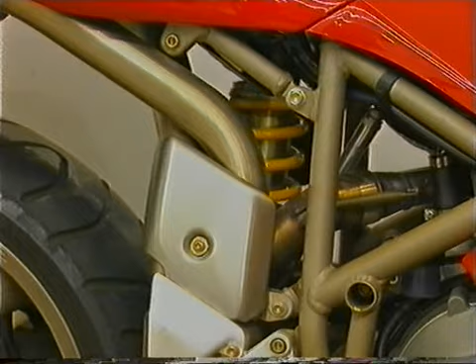They are the best, no doubt about it. They've got a great racing history, and they look fabulous. And they've got a real sort of jewel-like quality about the way they're put together. It's just a nice piece of kit to have. Everything's down to lightweight, beautifully engineered, and its whole purpose is to be this motorbike which they make for the road, but it's actually a racing machine. And that's all that's so exciting about it. But it's just this no compromise thing, you know. They don't want to sell them in big numbers. They only have to sell them to the people who really know. And that's what's nice about it.

It's very nice to have the same bike as your friend. They are very similar, but they're not the same. Mine's got a slightly different engine, and we swap and we compare. It's a sort of a boyish thing to do, you know, to ride around together. It's got this awesome performance, but although I don't use it, I know it's there. It's like, I suppose, a sort of feeling that maybe misers have when they've got lots of money, and they never spend it, but they know it's there.

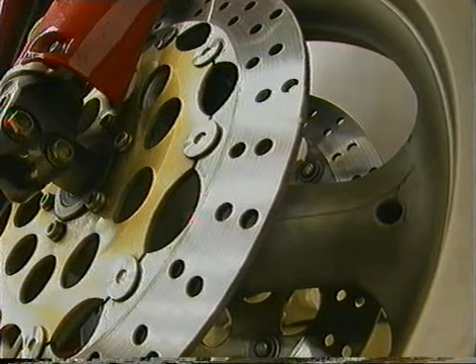Richard Rackham and Julian Thomson were to become key players in the new car project, codenamed M111. The actual link between the M111 project and the bike was something we could immediately see what was desired from the car. It was very much, oh, this wants to be just like a Ducati, which is a bit of a toy, you know, a rich boy's toy. Just something that you love having and love owning. That's what's important. The quality we'd like to have in a car. That's why we start with this project.

Lotus was founded by Colin Chapman, who was a very clever engineer and, above all else, a very competitive man in everything he did. During the 1960s, Lotus was perhaps one of the most famous racing car manufacturers, and this was the period in which Lotus's racing heritage was largely formed. One of the cars that contributed very largely to this was the Lotus 23. What this car achieved was to take on the might of the established sports car racers from Ferrari and the major continental manufacturers, and to really leave them for dead.

A decade later, in a bid to improve the company's profitability, Colin Chapman took Lotus up market and launched the Esprit. Over the last 20 years, it's developed into a powerful, sophisticated, and with a price tag of up to £60,000, an expensive member of the supercar community.

In the 1980s, Lotus wanted to add to our product range, in addition to the Esprit, by presenting a smaller two-seater sports car. We identified a very substantial market for this car, and in order to equip ourselves to meet this demand, we invested a large amount of money in the engineering program and, in fact, in the production process.

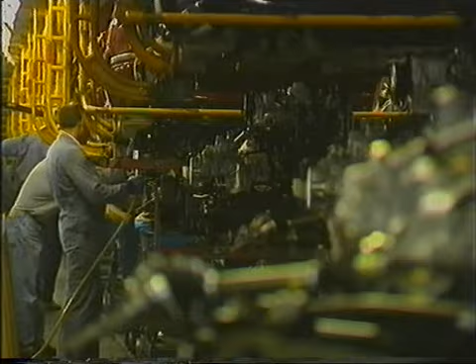But it'll call for a radical change in the way they build their cars. There's a confidence gap. The big car companies are almost too big to gamble on going into production with revolutionary lightweight technologies which might not work.

But Lotus felt it could, and early on in the M111 project, the Rover Group became involved in discussions, keen to support and encourage the Lotus engineers. The targets and the risks - I think it's very important, particularly for our engineering clients, that they understand the risks we're taking with a project such as this.

But after being taken over by BMW, Rover pulled back from the project, leaving Lotus on their own. I think it's always helpful to have a sort of big brother overlooking you, but on the other hand, we are used to running our own type of business, quite flexibly. So I don't think we felt particularly vulnerable.

We had a situation where the board of directors of Lotus could see that we had a vision of a product which could be very successful, that they had a group of engineers who were not only capable of achieving the program and doing it very efficiently, but would be driven by enthusiasm to make the car as exciting as they possibly could, and also that the idea of performance through lightweight and demonstrating new technologies would be relevant to the whole of the motor industry.

In January of 1994, the board of Lotus Cars gave the go-ahead for Project M111.

Many staff at Lotus had a vision of what the M111 should be, but it was the head of the styling team who was asked to flesh out the basic concept.

Julian Thomson: I guess all young boys are interested in cars. They always start playing with them and then start drawing them. Certainly all my nephews and all the young kids I know are always interested in cars. It's one of the things boys do. And most of them grow out of it, and some of them don't. I think that's where a lot of car designers come from, basically. And I just kept drawing cars for some reason - I don't know why, just liked them.

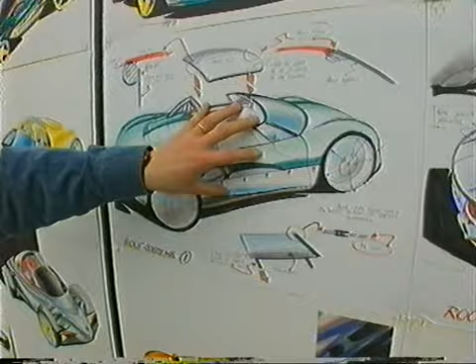Now, yours are a lot more retro, Andy, if I can say that. Yes, I think some of the themes I've tried to pick out here are things we've been talking about, where it's a bit like a motorbike for the road. This one is sort of looking at a simple, almost a get-you-home soft top roof - something you scrunch up in a bag and throw in the boot, and if it looks like it's going to pour, you can put it over the top of the roof to get you home.

The M111 was conceived as a step-in car, a car with no doors. But inspired by cars like this 1950s Mercedes, the design team argued for distinctive gull-wing doors. Project manager Tony Shute feared they were too complex. The gull wing, technically, is very nice. Everybody likes the idea, but in a way it's down to Chris, because if we can't do it, we haven't got much time for such a system. If we're not confident day one that we can make it work, so it doesn't leak, doesn't have wind noise, etc., then we really have to consider whether we can pursue that route anymore.

I think the loop you're going round is if you glaze it with Perspex, which is the proposal that's come from Andy and people in styling. We're not sure about forming something that size accurately, and I don't think it'll be stiff enough as a panel, so we'll need to mould a composite inner to the section, which is going to add weight.

Also, you'd really need to support it with a strut, so you're into a mechanical strut or a small gas strut. And then you're going to go through the sealing loop. You need gutters around all the edges to get adequate drainage. Let's not forget that a conventional door, conventional soft top, as far as the customer's concerned, isn't that attractive when compared.

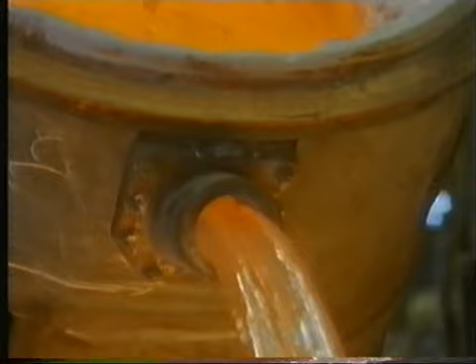The company is part of the Norsk Hydro Group and has been involved in the production of aluminium, mostly for the construction industry, for over 30 years. Recently, Hydro set up a new division, Automotive Structures, a new part of the company to specialise in developing and manufacturing lightweight components for the automotive industry.

Components are formed by taking billets of aluminium, like these, heating them to make them soft, then squeezing them through a complex die to form extrusions.

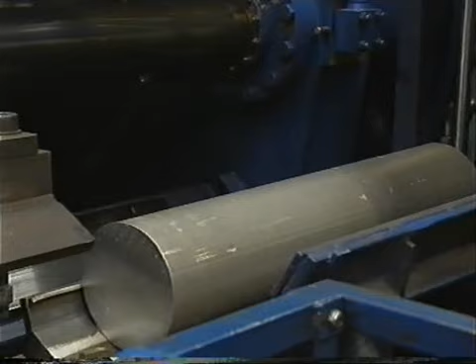An extrusion is something that most of us would understand if we thought about a tube of toothpaste. When we squeeze toothpaste, we extrude a solid cylinder of paste out. If there was a little ball on the exit nozzle of the toothpaste, when you squeeze the toothpaste, you squeeze a tube out. You see this sort of thing in the kitchen with macaroni, a pasta machine. All this is taking a big blob of pasta and it's squeezing it through a die and it comes out of shape. An extrusion is that.

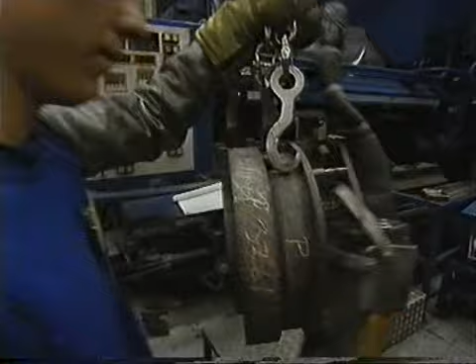We take a billet of aluminium, push it through a die and it comes out in shape. And if you want cavities in it, you put these sort of ball shapes in the way so the material has to squeeze around them and you get the cavity. It's squeezed out in lengths, they can be continuous lengths of 20 meters or so. It's produced at an alarming rate.

And on the 111, one squeeze, which takes about a minute, will last several years' production for some of the small components, not on the chassis, but individual components. It's really a material cost you pay for. You don't pay for this great form, you just pay for the weight of material because the process is so quick.

Once Richard Rackham had understood the potential of complex extrusions like these, he began to design his own for the chassis of the M111. His colleagues were surprised by this completely new approach to building a car. What on earth's going on, making a car structure out of greenhouse parts? That's what most people see, or double glazing. That's what greenhouses and double glazing are made of - extrusions - because they're incredibly adaptable, and used in the correct way, a different set of advantages can be brought into a car structure.

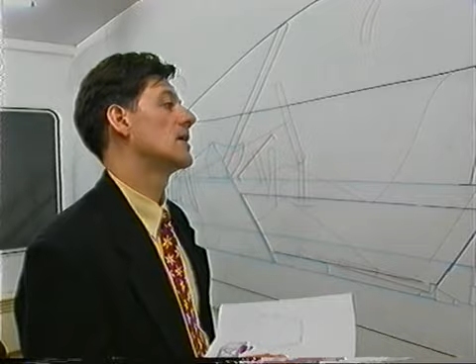This is the level of sketch that we get to before we go to full size. But it's full of lies, so we have to go to full size to understand how an occupant will interface with these ideas. The occupant, Agent Orange, is shown here. Everything about him centers around the hip point, which is there. Agent Orange, as we call him, is a result of wartime American research into how big they should make the cockpits of aeroplanes. This is Mr. 95th Percentile - that means 95% of the population would be comfortable inside this car. The unfortunate thing is, in 1945 or 1950, people were a lot smaller, so we've allowed two clicks more rearward travel on the seat and a little bit more headroom.

The great thing about using tapes in this drawing is that you can just rip them off. If we change our mind about where this side duct should go - and this is a styling function - we can reposition it quite simply. And it's very easy to visualize. It's not as hard as a pencil. You see there are pencil lines on here, but they're all very soft, and that's where we're using the two mediums.

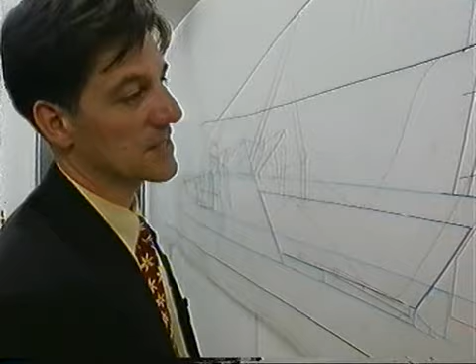We know you can use colour to your advantage. Blue means chassis, orange means occupant, and we put various other colours in there. So when you're working just with the chassis, you can see where all the relevant lines are. And the thickness of the line as well - just like with pencil, you'll push a little bit harder when you mean it. We put the line in here for the ground - we really mean the ground is there, and we really mean the tyres are there. And the outside shape is there. But if we've got a little sketch in there, maybe we're not thinking about it fully, and when we put a thin line on there, it's a good way of expressing that.

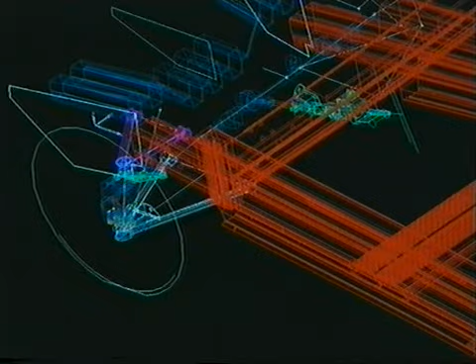Soon after the basic building blocks of the chassis were laid out on the tape drawing, their details were fed into a computer-aided design package, and a 3-dimensional model began to take shape. This incredibly accurate tool would become the reference point for the scores of engineers working on the project, and in the absence of a real car, the arbiter in many a dispute about who could put which component where.

But Lotus were not the only company working on a lightweight aluminium chassis for a sports car. Renault were also working on one for the Sport Spider, also with Hydro Aluminium in Denmark. The Renault chassis is welded together. Lotus believed they could use much thinner extrusions and therefore save even more weight if they glued or bonded theirs together. The engineering company wanted us to bond because that's what our customers are interested in. We also had an expert employed who told us we should bond, which also encouraged us to go down the bonded route - and I think that's quite important. To actually meet the cost and the weight targets that we have for the frame, we couldn't seem to achieve that through a welded structure.

Lotus then needed expertise on glue. After talking to several adhesive manufacturers, they found a second strategic partner in Ciba Polymers at Duxford in Cambridgeshire. Going back to the early days, this was when Norman de Bruyne started this company. He was a Cambridge University don, and he was very interested in flying, and wanted to build his own aeroplane. Aeroplanes in those days were built using wood and canvas, and the glues that were used to bond them were milk-derived, and they were subject to fungal attack under moist conditions. Norman de Bruyne very wisely saw that an adhesive would be useful which didn't degrade under those conditions.

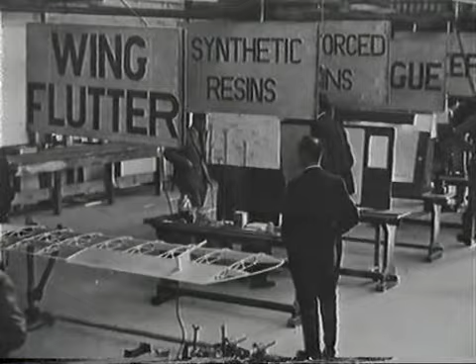He thus developed the urea formaldehyde adhesives. From there, this company got involved in many, many aircraft structures. The car industry has some different requirements to the aircraft industry. In the aircraft industry, most of the metal being bonded now is large area, so the adhesive doesn't have such a concentrated stress. Also, believe it or not, in the aircraft industry, you don't really need very much in the way of impact resistance. If a plane goes into a hillside, I don't think any amount of adhesive would help very much.

The car has to resist normal running and also any crash loads that are imposed on it. So we had to build an adhesive which would be high strength, withstand the weight of the engine and other loads, the passengers, but also be resistant to impact loads during crashes.

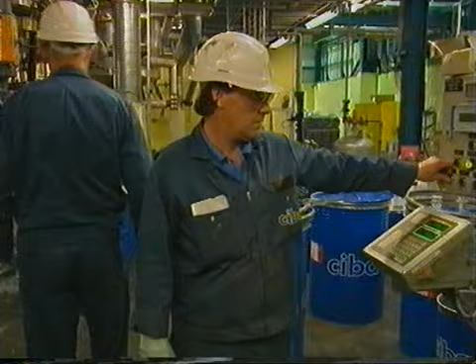Now normally you'd think of a high strength adhesive as being something that withstands high loads but is quite hard and easily shattered. What we've managed to do is combine that with the properties of a rubber, which under impact is very resistant and doesn't shatter. So you've got those two properties combined in one adhesive. In the past that hasn't been possible.

The adhesive was a breakthrough, but many questions remained about the bonding process. Ciba, Lotus and Hydro pooled resources to research the key issues: how to treat the aluminium surfaces for bonding, and how and in what conditions the glue should be applied. Throughout this period, Lotus always had a fallback position, a design for a slightly different chassis which could have been welded.

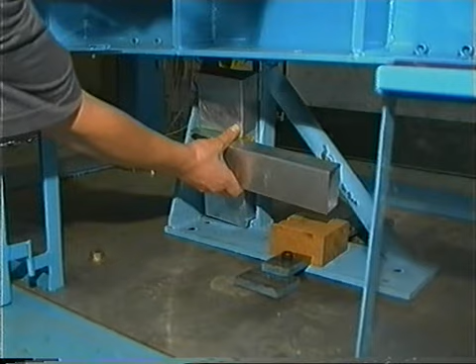At the Lotus workshops at Hethel near Norwich, engineers began testing the first of the bonded aluminium joints and used a simple rig to compare them with joints that had been welded.

With the dynamic testing, we're dropping a weight of 15.7 kilograms, just free fall, over a height of around 2 meters. This test here is one of the dynamic tests that we did. The main problem with using adhesives is peel stresses, which in our case we get in this corner here as we're applying the loads.

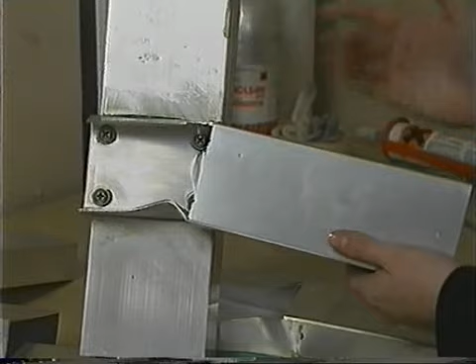In order to alleviate this problem, we've added mechanical fastenings as close as we can to the corners of the joint. Basically, if we can put a rivet in, as soon as the adhesive starts to peel away and hits where the rivet is, the peel stress will stop. So therefore we shouldn't have as much destruction of the bond area.

If we compare this to an actual welded joint, which had the same energy put into it, we can see a lot of buckling of this member here, and also quite a lot of buckling here. Under these experimental conditions, the bonded joints, which included rivets to stop peel stresses, were proving stronger than the joints which had been welded. So the prospect of a bonded aluminium chassis looked promising.

However, the legal department was about to drop a bombshell which would result in a redesign and a headache which would cost the project hundreds of thousands of pounds.

We've got to the stage now. The basic concept of the car was a step-in vehicle without doors. Right, and it's a bit of a problem to us. We've now pointed out there is a regulation whereby, with the design we have at present, we don't meet legal requirements in terms of step over height. I think it's important that styling understand this in some detail, because it's going to change the project quite dramatically if we're now going to go away from a doorless car and go to a car with doors.

Well, if the entry area to the vehicle is more than 750 millimetres from the ground, then you have to have running boards. When you say running boards, you mean some sort of step area designed into the side of the car, like a Land Rover. Yeah, you've got designed in, are they? You've got to drop that on the side. You really got to drop the top of the door area down, probably 30 millimetres.

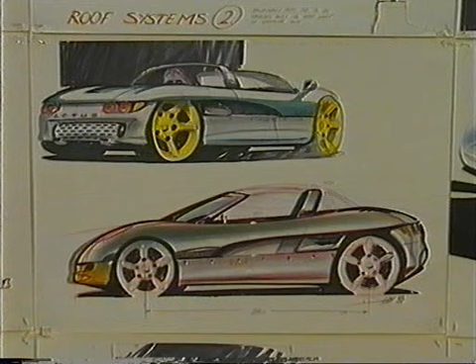The next bombshell from the owners of Lotus landed in the design office. Suddenly I had this threat that maybe this car was not going to be designed at Hethel, but by one of our competitors. Because we didn't know Bugatti very well, and because they're Italian and had asked lots of other Italian design houses, we were very worried about losing it.

And personally, I hated that time. There was an excitement of doing this car, but having the threat of it being taken away from us was horrible. A packing crate, one metre square, arrived with proposals from eight other design houses. I had to stick these up in my office alongside our designs, and we won basically, which was very satisfying. I could have done without it though, for sure.

Once we completed the initial sketch phase, we were keen to get into the next area, three-dimensional scale models. The sketches can only tell you so much - they give you a character of the car, but you can't understand the shape until you get to this stage. From this model, we identified that perhaps this was a little low overall height-wise, the sill was probably too high to step over, and the model is just a bit too short to package what we wanted into it.

So we moved on to the next stage, which is the green car. The green car addresses a lot of the problems we had in the silver car and also moves the styling on to the next phase. We're always progressing it and looking at it. So this model is getting much closer to the real car, which allowed us to go on to the next stage, which is a full-size model.

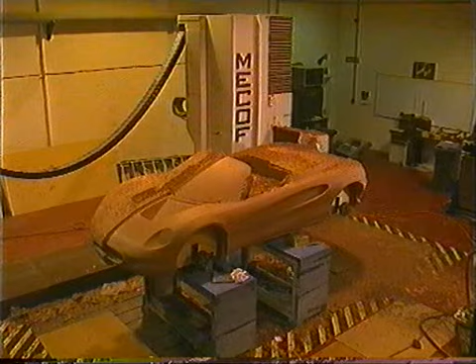When we first sent the full-size clay to be machined, the company that did this for us at a very competitive price had never machined a clay before. It made such a mess in their workshop that they vowed never to do it again. But it was fascinating watching this blob of clay just being turned into a 111. Quite a fascinating sight.

We prefer not to do at Lotus a lot of detail development on the scale model - we prefer to get to full size. So we would have digitally scanned the scale model, measured it all over, and then got a computer to make a full-size image and machine a block of clay. It's not a solid block of clay - it's got about a 30mm skin on a foam and wood armature.

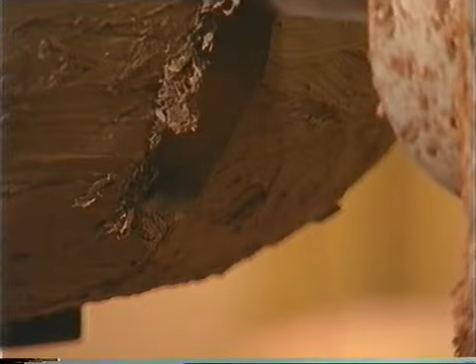The problems you always have when you go from a scale model up to full size are scaling problems. If you look at a car on a table it's just big, but inevitably when it gets to proper size and you're walking around a car park, it's not going to be exactly the same. A good example is when people like Corgi make a scale model of a car - they exaggerate certain features just so it looks right.

The clay we use isn't actually like potter's clay. It's more like a wax, in that it comes out of an oven hot - it's a bit like melted chocolate at that point. The moment it sets, it's like hard chocolate.

While the full-scale clay was emerging, a third-scale model of the M111 had been taken to a wind tunnel for aerodynamic testing at the Motor Industry Research Association. In its crudest form, the wind tunnel is a large working section where air is drawn through past the actual model. You have a large rubber belt rotating underneath the model, representing a moving ground, moving at the same speed as the wind - replicating the way the car moves in the wind relative to the ground in real life.

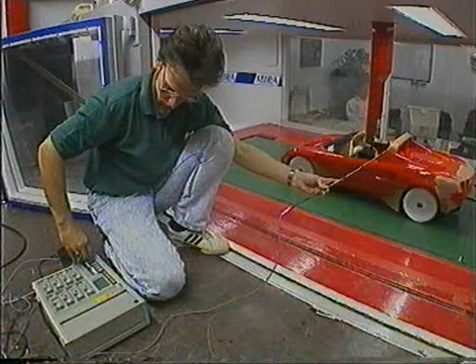Within the wind tunnel model, we have a balance.

It's a glorified pair of bathroom scales, basically. It measures the forces in three directions: the longitudinal sense, measuring aerodynamic drag, the vertical sense, the aerodynamic lift, and the horizontal transverse sense, the aerodynamic side force.

There's often no substitute for literally seeing what's going on, so we'll use a smoke stream. It's a vaporized paraffin oil that's pumped through a heated lance, and that physically visualizes the airflow as it moves over the car.

Fundamentally, we knew we were going to have problems aerodynamically with the car right from the word go. The physical proportions of the car meant we were going to have problems, and the initial design concept was very striking visually, but I knew it was going to cause me some problems. It was very short, very stubby, very fat and very low. That inherently usually means high drag. It's not going to be an ultra sleek, ultra low drag car.

The initial results were not desperately good, and there was some suggestion that it was about as aerodynamic as a brick. This is kind of unfortunate because the car had a real style to it, and whatever happened, we didn't want to lose that look of the vehicle.

The aerodynamicist did a spot of restyling in the wind tunnel, mainly to combat rear lift, then broke the news to designer Julian Thomson. 'What I'm worried about is that you've destroyed certain aspects of the car completely.' 'Yeah, sure, the back-end design is just completely thrown away.'

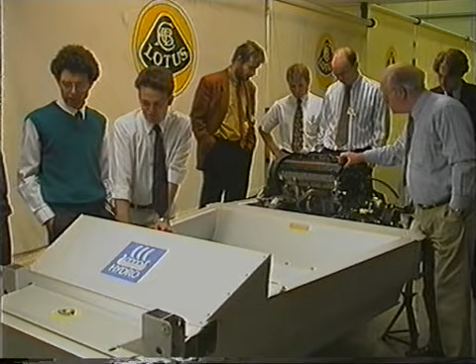As the discussion on restyling continued, the first prototype chassis arrived at Lotus from Denmark. When the first chassis arrived, that was a key point in the design program, and it was quite exciting as the box arrived and got lifted out and put on display. Everybody's reaction was like something that had come from another planet, because it's a very aesthetically nice piece. Aluminium is a very nice material to look at and touch, and it was a very simple chassis which people, I think, could relate to.

A lot of people thought it looked weird because there was nothing seen like it before. There were a lot of people walking around banging it, listening to the sound of the drum. I think that was probably the biggest criticism. But for every one of those, I think there were probably 100 who looked at it and thought, this looks really space age, this is where we should be going.

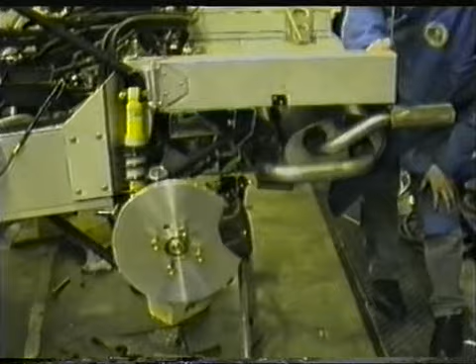For the next 4 weeks, technicians worked around the clock trying to get the first chassis running before the Christmas break. On Christmas Eve, they were still at it. We're desperately keen to drive the car before Christmas, and everybody had been working many, many hours, and it would have been very disheartening to go away for the Christmas break not knowing what it was like.

And there seemed to be, at 6 o'clock in the evening, about 50 items that still needed to be done. Looked like an impossible task, but the question was, is there anything we couldn't do by midnight? And nobody could come up with anything we couldn't do, so therefore, by logic, we should be able to do it. The excitement had been building through the day.

Lots of people were guessing how much it's going to weigh. We had a little sweepstake going. There was the enthusiasm of the technicians, some I'd never known anything like it. We were all getting stuck in. We just wanted this thing to roll. And at the time, we even thought it didn't look half bad because, you know, love is blind. Looking at the Proto 1 now, it looks hideous.

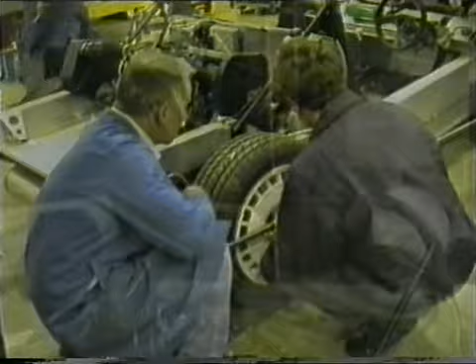Happy Christmas, Richard. I'll see you next year. Yeah, definitely. It's like that car.

When it was time to drive, we fired the thing up. I put our crash helmets on and went out onto the test track. It's icy, it's a brilliant moonlit night. It was really, you know, one of those magic moments. The first impressions of the car were really quite amazing because the car was very, very quick. The engine, the torque and the lack of weight, the thing was just so dramatic that it was quite a surprise.

Also the steering response and items like that on a first-off prototype were just something I'd almost not experienced before. And I remember as we were coming around the main straight of the circuit at Lotus, I started to get wet, and I thought we were really lucky because had we been 5 minutes later, we'd have not been able to go out, because it had been pouring with rain. What I hadn't realised was it was a heater pipe that had come off, and I was getting covered in antifreeze, which at least was keeping me warm, if nothing else. So it was a great moment.

We got the car back to the workshop, all then disappeared off down to have a few beers in the pub. We also realised we had an awful lot of work to do the following year. There was a lot of development, a lot of durability testing, just a massive, massive task. So we went away happy for Christmas, but we realised that it was going to be a tough year to come.

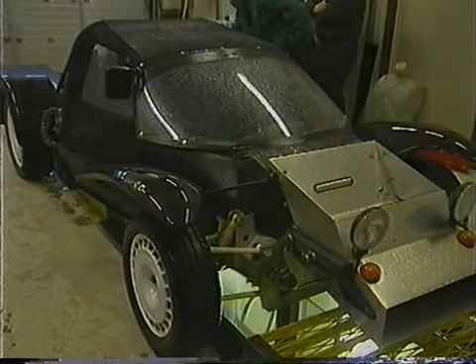In the new year, Proto 1 was taken to Millbrook, a top security vehicle proving ground in Bedfordshire, to be tested to destruction. The big concern was over the aluminium chassis and the revolutionary way it had been glued or bonded together. Laboratory tests suggested bonding was stronger than welding, but would the bonded chassis survive years of battering on real roads? The Millbrook test circuits are designed to find out.

The big test for a bonded structure, or for any structure, is for it to complete what is known as the Belgian Pave test. That's 1,000 miles of extreme testing of severe surfaces. It's like the worst road you can go over. It's called Pave from Belgian Pave, when the roads were traditionally made out of cobblestones, and it just vibrates the car to death. And if a vehicle can survive that without any structural problems, it's done quite well.

But you run around at 30 miles per hour. You can only do that for about a 15-minute stretch, and then you have to have a rest. It just shakes you about so much.

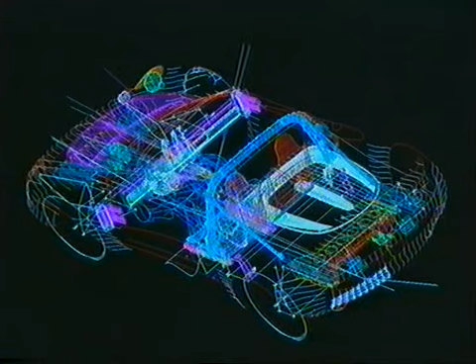The main chassis structure continued to prove immensely strong, but 3/4 of the way through the Pave testing, cracks began to appear in the rear subframe, which had also been made of aluminium.

I'm not happy with the way we're using an aluminium rear subframe. It's just the loads going in - it doesn't want to be made from aluminium. I feel like we're doing it because the rest of the car is made of extrusions. It's mega expensive as well, isn't it? It's not - it doesn't lend itself. The rest of the structure is quite elegant, but to use an aluminium rear subframe bonded together isn't a direction I'm happy with.

Another problem we haven't really thought about, or I've only just realised, is that the catalyst - we're testing now in the middle of winter, 30 miles an hour around Pave. If you put that into the middle of an Italian summer with a much more enclosed rear end than what we've got, the catalyst temperature is going to be going into that rear subframe. The adhesive is good for 200 degrees C. The catalyst runs at 600. There's going to be lots and lots of heat insulation in there.

We've got to come up with a way of making it from steel which doesn't distort. We want 0.5 millimeter dimensional accuracy on all the hard points. And it's not easy either, because the transverse engine is difficult to get around, isn't it? Yeah, it's terrible. This reinforcement has had to be put on to really hold the thing together. Yeah, I think there's some serious cracks here.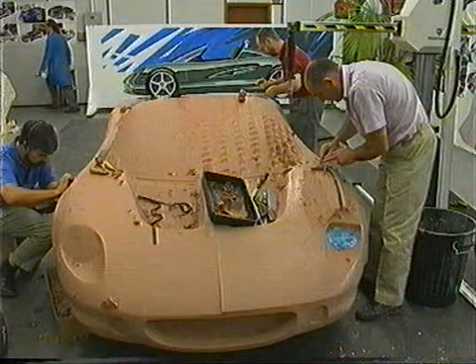In styling, there was a problem which wouldn't go away. The full-size clay model, which would be the master template for all the M111's body panels, had arrived at the design studio. A team of model makers had begun the intricate task of shaping its surfaces by hand.

This is how the head of design, Julian Thomson, intended the car to look, with simple flowing lines. But wind tunnel tests on a third-scale model had shown that Julian Thomson's original design gave the car too much rear lift. The aerodynamicists feared that in such a light car, it could cause instability. So the design had to be changed.

So we had to add on this spoiler on the back, which we did agonise over a lot, because it did take away some of the purity of the car. But it did add some originality, and it did add some aggression. So now I don't have a problem with it, really. I quite like it, actually.

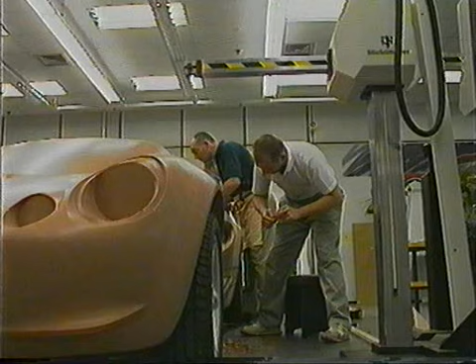The reason we use clay and not wood or foam is because the whole process of developing the model means changing it a lot. We employ model makers to not just build the model once, but to keep changing it to our instructions, to keep taking away and trying different things in 3 dimensions. So a good model maker has to have a lot of patience with his designers. He has to be prepared to make something beautifully and then have a designer say, no, I don't like it, do something else.

After the redesign, prototype 2, fitted with handmade body panels, was taken to a full-size wind tunnel. We came to a nice compromise in the middle between the styling and the aerodynamics, and the designers were happy with what they were seeing visually. When we got to the full-scale prototype stage in the wind tunnel, we were looking a little bit more detail.

At that stage we found we had a compromised result between the extreme I developed at model scale and the initial starting point of the designers. By the time we got to the full-scale test and development stage, the car felt very good—pretty much just the right amount of turbulence, the right amount of wind in the hair. There was a little tweaking to be done on the rear buttresses, which had to be brought inboard a bit because too much air was diving inboard of them, but it was pretty close to what we'd intended.

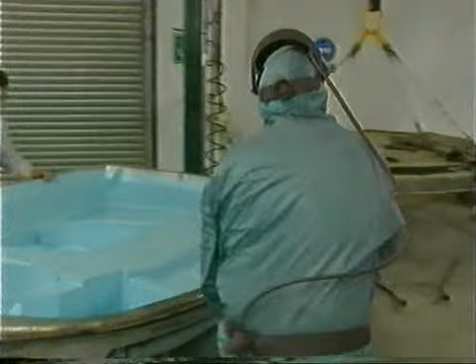Once the styling of the M111 had been signed off, it was over to the manufacturing team to put the panels into production. 20 years ago, Lotus invented VARI, vacuum-assisted resin injection, a process of mechanised moulding where sheets of fiberglass are sandwiched between two moulds and resin is injected between them at high pressure. The process is accurate, produces a consistently high-quality panel, and has low labour costs.

This is a VARI mould for an inner panel on the M111. The network of piping ensures equal distribution of heat during the curing process. But it soon became obvious that the complex curves and swooping shapes of the M111's outer panels could not be made with VARI.

The preferred option within the company now is VARI. One of the things Julian wanted was a fairly evocative style, which wasn't really suited to manufacture using our VARI system. We've been using that system since the Elite—it's very low labour intensive, gives good quality panels, but a lot of the features Julian wanted around the headlights, on the rear of the car, the rear spoiler, rear lamp area, didn't lend itself to using VARI. Styling, as usual—and Julian Thomson will hate me for saying it again—they always try to push right to the edge of the envelope. They always want the lights in almost an illegal position, and they always produce shapes which the body process people hate because it compromises their process.

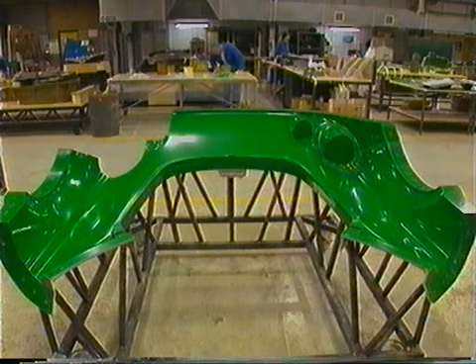The body panels team had no alternative but to build complex sectional moulds, which are used in the more labour-intensive and therefore more expensive hand-lay process.

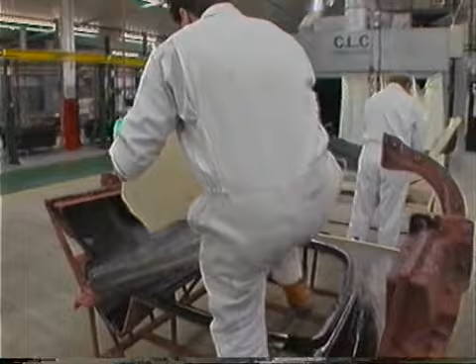With the hand-lay tool being in sections, although it does allow us to produce these complex shapes, it gives us a problem—every time those sections are removed there's a chance of damage to the joints between them, which leads to repairs in the paint shop of the finished component and requires that the tool is serviced on a regular basis.

The project team has been made up of several people who haven't been all the way through a program before. They've brought a certain amount of lateral thinking into the program, and it's been quite frustrating at times trying to explain that if they stuck to their original disciplines and listened to people who'd been through the body or manufacturing processes before at Lotus, life would be a lot easier.

A few months later, the first set of hand-finished, painted body panels were ready for fitting to prototype number 3.

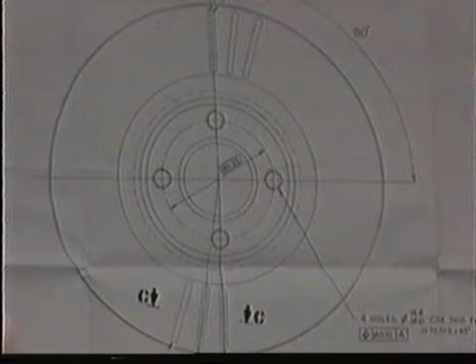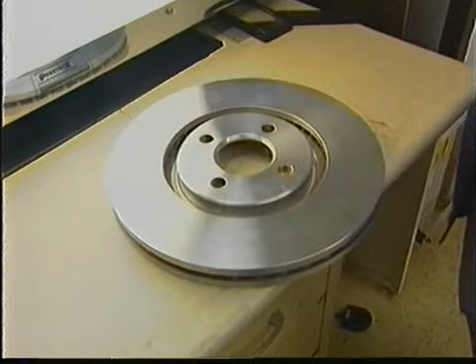Our materials are lightweight. They have other advantages - they're also very wear resistant. Whereas a normal brake disc or drum would be made of iron, a ferrous material, and that material would normally wear over time as the brake pads acted on it and wore it away slowly. These materials behave in a very different way. The brake pad coats the disc with a transfer coating, a layer, and the braking action comes from that transfer layer. Once that transfer layer is established, the wear rate of the disc is very, very low. At least conceptually, we could see a disc lasting the life of the car, 100,000 miles.

One branch of our technology allows us to make a composite material which, under a certain restricted set of conditions, can be cast just like steel, iron, or aluminum would be cast in a relatively conventional foundry. We made the prototype discs here using a sand casting technique, where we make a sand mold which is the reverse of the shape we want.

Pour into that sand mold composite molten aluminium containing reinforcement, allow it to harden within the mold, and then break the mold open and allow us to take out the final part.

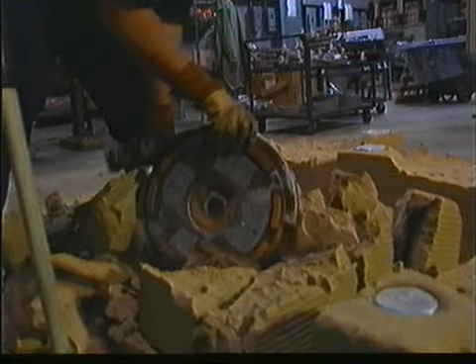A second US company became involved in preparing the MMC discs for Lotus. Hydraulics are part of a massive company which supplies brake parts to motor manufacturers and consumers.

They also believe that lightweight aluminium components are their future. There is increased pressure on lighter weight vehicles - there always has been, and I believe there always will be into the future. When that next oil crisis comes, whenever that is, there will be a lot of pressure to eliminate as much cast iron as possible, and the unsprung weight of cast iron products like drums or discs will be a great candidate to reduce that weight.

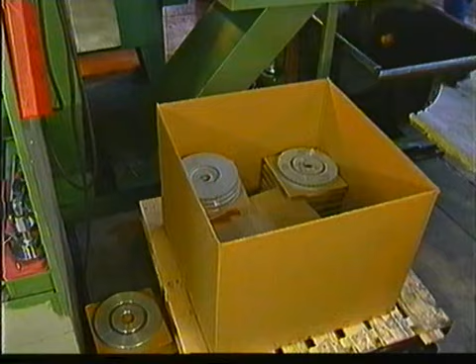The metal matrix discs, which may eventually be developed to last the lifetime of a car, are also very difficult to machine. Hydraulics had to invest heavily in diamond tooling just to supply the prototype parts.

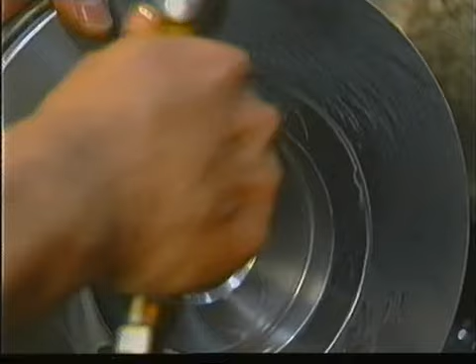We don't look at the program as a program where we're looking to make a lot of money. Quite the contrary, we look at it as an R&D program. We are involved in new technology that many of the other major brake rotor disc manufacturers are not involved in, and the Lotus is one of the first programs that is actually going to market. We, as a very progressive and growing company, wanted to be at the very forefront of that technology, and believe that that will be where the growth will be for us in the future in these various niche markets like the Lotus program.

At the Lotus factory in Norwich, the team developing the M111 had grown. I would like to make that an option if possible, so we can get loads of dosh for it, for the passenger side. If there was a footrest there, then that would impinge on him - yeah, that would stick in the back of his legs.

Ride and handling experts were now at project meetings, bringing feedback from the test track. Those who'd be responsible for building the assembly line were also involved, as were those who still had to source nearly 2,000 production parts for the car.

The head of design, Julian Thomson, who originally styled the M111, found himself defending his concept now that people with the practical responsibility of putting the car into production were involved.

Well, we've always been underdogs. I mean, whenever a company, there's always been a battle between engineers and stylists - they like to call us that. They group us together with hairdressers and the rest of it.

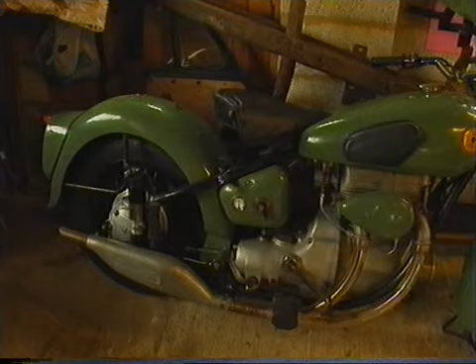What have we got? Right, this motorbike is a Sunbeam S7. It's a design classic. This is the sort of motorbike you saw in the Christmas cracker when you were a little boy. It's got big tyres, great proportion, all the mud guards are really rounded, everything flows into each other. There are unique design features on it. I don't want to go into too much detail, but you've got a cast aluminium silencer, shaft drive, the car-type gearbox and clutch, 2 cylinders in line just like an old car engine. You've got a distributor on the back of the overhead camshaft like a car. The generator is right on the crankshaft line.

Oh, it's just full of it. I don't know how you're supposed to read the ammeter though - you have to look under your leg when you're going along. But it was a revolution, really. The guy who designed it, Erling Poppe, unfortunately went too far with his single-mindedness, and it cost him his job because this was very expensive to produce. Full of unique features, but they were all so new to the manufacturer, it just couldn't keep up with it. There was too much, too soon. But now it's quite desirable, I think.

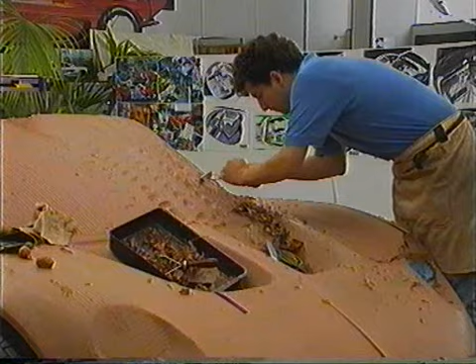I think probably the most difficult period in the whole process was really trying to resolve some issues over windscreen design, which was very, very difficult and caused a lot of grief, to put it bluntly. The problem was that it was thought that a screen of that shape and curvature couldn't be wiped with a single wiper, because the wiper has to go completely around the corners of the screen. I really wanted there to be a central single wiper. The reason for this is it's the most efficient aerodynamic setup you can have.

And it's very cheap, and it looks racy. You look at any old Group C car, there's a single wiper in the middle going like crazy. We didn't want pantograph wipers, we didn't want 2 wipers. But there are some very heavy legal restrictions on what you have to do. You have to take vision lines from the occupant, pass them through the screen, and a certain percentage of that area the occupant looks through has to be wiped. If you have a very curved screen and a single wiper, it's difficult. Unfortunately, some of our engineers would like to design wiper systems for any car, and they weren't willing to look at different solutions - it really comes down to putting your job on the line a bit to fight for something.

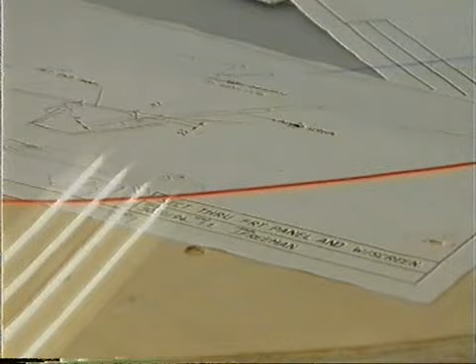There was a screen with the plastic screen with all the wiped areas denoted on it - areas we had to wipe. I went out one day and put a Citroen AX system on it and declared it could work with a single wiper. What I did is I tilted the wiper motor spindle slightly in relation to the screen, and that made it possible. Maybe it was actually holding a wiper motor and having the parts in my hand that made me realise that could happen. I'm sure other people could have seen that too, had they had the parts in their hand at the time.

At Millbrook, testing of the heavily disguised prototypes continued in secret, but one motoring journalist, Jeremy Walton, was allowed an exclusive preview of the M111.

Steering is truly delicate, truly like the original Elan. Magnificent.

Now this morning this car's been through 20 stops from 105 miles an hour to about 50 miles an hour, so anything I'm going to do is quite lenient on it.

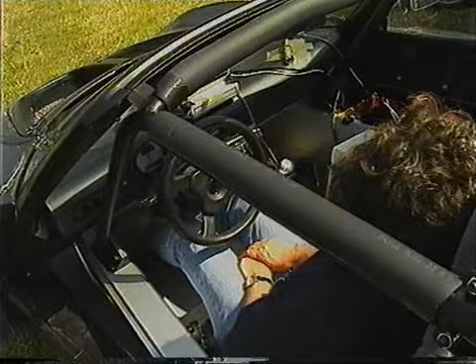Yeah, the engineers tell me that going to Stelvio to do brake testing is essential. I've never been myself, but when I see the photographs, I think maybe the location says it all, really. It's obviously a very nice place to go.

It is an industry standard, particularly for driving down hills with caravans and so on, where the car's going very slowly and the weight of the trailer is pushing the car down. You can find you lose brakes when you get to the bottom. Because we're using new technology, it's very important that we've proven we've gone to Stelvio and that it will survive all those sort of tests.

One of the big details I always remember is there's really no runoff area, so if you misjudge it, you could quite easily end up down the bottom of the valley. When you're driving down there, as well as driving as hard as you can to give the brakes as much grief as possible, you're also in the back of your mind looking out for any signs that will warn you of a possible failure, because we are talking about prototype parts. It's a very, very harsh environment - the gradient and the twists you find in this particular location wreak absolute havoc with the brakes.

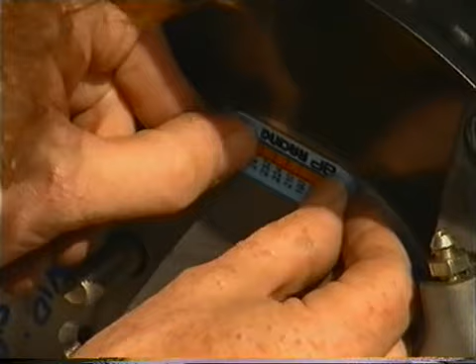What we wanted to do was make sure the system worked, that the brakes were going to be acceptable for this sort of car. So we weren't really concerned about the design that much, but we were concerned about the application. We came back from Stelvio with a very warm feeling for the brakes in its application, because we felt we'd proved out that the application worked on the car in its harshest environment.

The results we found at Stelvio were that the disc runs at a relatively low temperature compared to a cast iron disc, and that really was quite surprising, because the MMC dissipates heat so quickly. Running some of the most arduous brake tests we carry out in Europe, particularly at the Nürburgring, where typically we'll be getting 600 to 700 degrees centigrade on the Nordschleife circuit, with this particular disc we only reach about 210 degrees - that's only just a warm disc basically, and that's got huge advantages in terms of wear. I think it's possible, maybe not on the car at the moment, but in future to make the pad and disc last for the life of the car - 100,000 miles.

Designer Richard Rackham was discovering the true potential of aluminium extrusions, components made by squeezing heated aluminium through a complex die. He'd used them in the chassis but found they provided simple, elegant solutions to other design issues on the car. You don't think about putting a bolt and a screw through two parts to join them - you think about whether you can make these two extrusions hook together and do away with the fixings. You look at individual parts and think, could they be an extrusion?

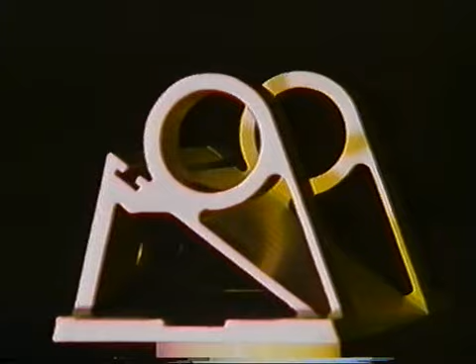Greatest thing was when I was working on the package, looking at the pedals, trying to fit a Metro pedal box in the car, which looked hideous. It was big, it was heavy. But I thought, hang on a minute, I'd sketched out an ideal pedal shape from the side, and suddenly I saw an extrusion there. And that was great. If I hadn't been tuned into extrusion, it would never have happened.

I think the pedal's caught a lot of people's imagination. It's something which everybody can identify with, because whatever you know about cars, you put your foot on a pedal. So that's one reason. The other reason is it's something which is easily held in the hand. It's got a nice curvy shape to it, and it's got a clever sort of pad which goes on.

Julian actually wants to turn one into a telephone, and he thinks we should send them off to clients, and that's the Lotus thing. Tony Shute, he's had dozens of them made up just to give away. I'm really pleased it's taken off like that.

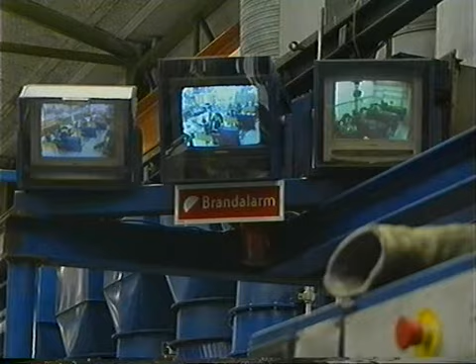Many of the larger extrusions are made by Hydro Aluminium in Denmark. These are the main side rails for the Lotus chassis. Normally, after being formed, extrusions are cut to length, then cured at high temperature to protect and strengthen the aluminium. But the side rails for the M111 need to be bent, so they can't be cured immediately. And, as there isn't a press in Denmark which is big enough to bend them, they're shipped to England, bent there, then shipped all the way back to Hydro.

Lotus became concerned about quality controls and Hydro's lack of progress with the new unit it was setting up to manufacture the M111 chassis. Quality assurance engineer Peter Wainwright was sent to the Danish suppliers. The result of the first visit was, from our point of view, quite disappointing, in that we'd come to Denmark. We'd found that there's basically an empty shell of a factory, a few offices, very few people, no real control systems, and a company that's got no experience of a job that we want them to do.

So over that summer, every time we made a visit, it became more apparent that things, shall we say, in line with a normal timing plan that you have for a project, weren't being achieved.

They set up the automotive structure division a few years ago because they could see that aluminium would become more relevant in the automotive world. Suddenly, they've got two projects which have come to fruition: the Lotus project, the bonded structure, and the structure for the Renault Spider, which is a conventional welded structure. In the past, they've had projects which had come to nothing, but suddenly these have both taken off.

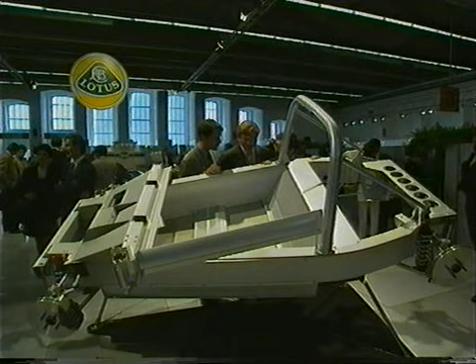It's the first time to show the car to your peers. The design community in Europe is very, very small, and we all know each other. When you design a car and it's been sitting in front of your desk for 2 years, you really can't evaluate it. You can't really know what it's about. So you put a thing like this, and it's sort of really a matter of what do you think. And at that point in time, your own opinions are very, very confused. So you're listening out for every single little snippet of what people are saying, good and bad, and dissecting everyone minutely and analysing it. Far too much. You shouldn't do that. So it was quite nerve-wracking for me.

It's sort of like a little bit of rivalry, you know, people looking at the car, how many are looking at the car, how many are looking at the chassis. I wasn't surprised, but a lot of people were surprised by how much interest there was in the chassis. As most designers like to think of themselves as engineers, they're all coming up and saying, oh yeah, great chassis, but could have done the body better sort of thing. And that was very much so - it was great for Richard, but it wasn't great for me.

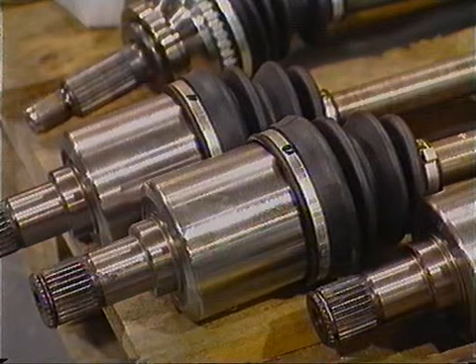Technicians were supposed to build 4 prototype cars to learn how and in what sequence they could be put together. But with the design still fluid, it was almost impossible. Well, 2 weeks ago when we came onto the line, we had very, very few parts. The chassis came in late, so we had to do what we could, sub-assembling parts that came in advance. It's very difficult to get any sort of controlled build when you have to build the car out of sequence.

The parts supply situation can be quite frustrating when the lads on the line are trying to help out and get the spec of the car together, and we pull the relevant paperwork out, find out what the fixings are, go to great lengths to find the part numbers, and then go to the rack and then find they're not here yet.

I think we have a lot of parts missing because the program is very short in terms of car design to production. We've had a few odd hold-ups along the way, as with any program, and the design is still fluid. Keeping pace with the design changes is very, very difficult, and I feel what we should do, and certainly we don't here, and I don't think many companies do, we should have a real solid design freeze.

But in reality this doesn't happen, because you get parts that have to be re-released for safety issues, legal reasons, cost issues, suppliers go down the pan. There are 101 reasons why. There's always a reason to change a part, and often it's also used as an excuse to improve the part where we realise that maybe it wasn't 100% in the first place.

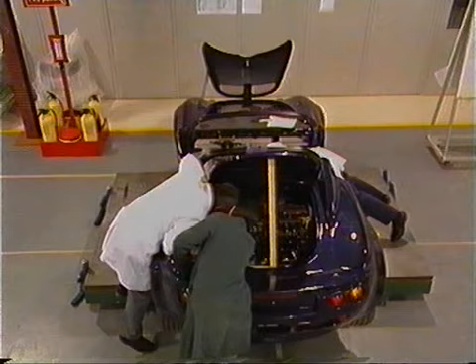At the current time I'd say we're about 4 weeks late on completing the first car. We're all prepared to work extra time as need be to get the project in. It means everything to us. It's our future.

The manufacturing team were forced to use a lot of slave parts to complete this car for the Geneva Motor Show - dummy or substitute parts which would eventually be replaced with the real thing. Keeping track of nearly 2,000 parts was proving a logistical nightmare.

The most significant part is the 118 with no supplier identified. Because those are items that at the moment we're still not sure on. A lot of those will be new parts coming onto the list where I just have a description, and as yet I can't really follow that up with inquiries. Again, some of those may be deleted at a later date. Parts come off the list as fast as they go on at times, but how significant they are, I don't know. They're not the difficult bits then?

No, there are some difficult bits. A lot of the door components are in there. Exactly - they tend to be the difficult bits that are difficult to resolve, don't they? The grills are included in that because we're still working on those, we can't actually order them. There's a few seals and things like that.

Something simple, like extrusions. The shortage of parts was beginning to delay car production, and the pressure was mounting for the parts buyers like Dave Smith. He'd sourced some header tanks, but it seemed his suppliers had stopped trading and closed the doors of the factory. Dave called on his network of contacts for help.

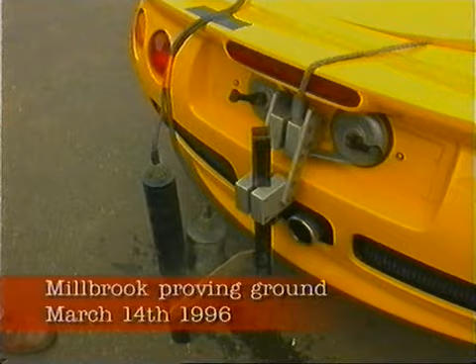In March, the Elise was ready for its official top speed and 0 to 60 trials at Millbrook. Okay, here you can see the lights Correvit system.

It produces the light which shines onto the ground, and as soon as you start off, it measures speed and distance. And this is all connected through these wires into the box of tricks, which is operated by the laptop computer. It's my first time I've used this laptop on here.

Everything all right? Well, I don't know, it's a bit confusing. That was only really flashing 4.2 miles an hour. Didn't I tell you this is going to be problems? It seems okay, except that looking down at the screen when you're doing it, that's showing about 4.2 miles an hour. Well, it sometimes shows 3 miles an hour, and you're doing 120.

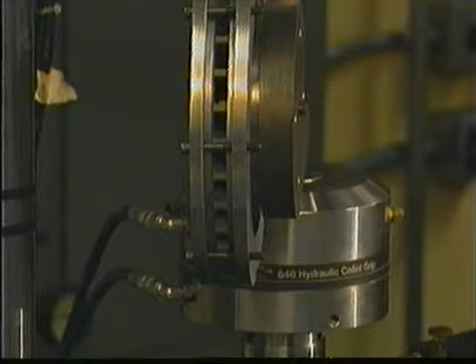In the United States, the Lanxide Corporation had developed revolutionary lightweight brake discs for the Elise. Very late in the programme, Lotus discovered cracks in the discs, which are made from a mixture of aluminium and ceramics. Only a redesign and expensive retooling would solve the problem.

The Lotus disc is in its second design. The first design was very flat to fit within the envelope afforded by the car - the braking plates and the hub are very much in the same plane. This causes something of a problem when friction is applied to the brake plate and the brake plates try to expand.

This expansion causes stresses in the hub, and this particular design develops quite high stresses in the hub area. The redesign joins the hub to the other brake plate so that there is a hat, or an offset, within the disc. This allows the brake plates to expand without placing too much stress on the hub in the hot condition - a solution which stays within the envelope of the car, allows for some offset, and eliminates the high stress situation in the hub.

We made the prototype discs here using a sand casting technique, and currently that's the product we're providing to Lotus. We have a vision of the future, a better process, a better way of achieving the final product, not to cast the mixture into a shape, but to take the ceramic or the reinforcing elements of the composite, form them to a shape, and then introduce the aluminum just into that shape by a process we call infiltration.

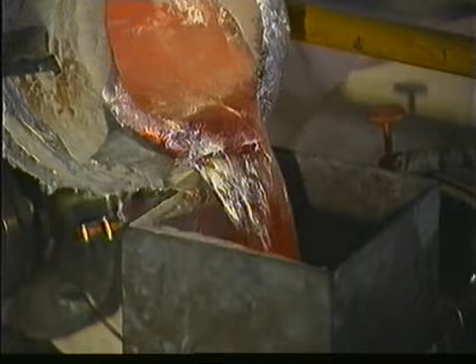This molten metal infiltration process allows us to have the shape of a disc which is very close to its final form, introduce the metal, and finish up with a part that needs very little machining, maybe none in the final design, perhaps no machining except a smoothing of the braking surface itself.

In March, Dave Minter and Tony Shute took 2 cars on a long drive over 1,000 kilometres to the French ski resort of Chamonix, a base for somewhat delayed winter testing in the Alps.

From my aspect, I don't often get the opportunity to spend a reasonable amount of time in the car. I think if you're not very careful, you end up doing short trips in Norfolk, 20 minutes, half an hour, and you miss an awful lot of what's going on with the vehicle. You have to put yourself in the picture of a potential customer. Driving it in Norfolk, or for an hour at a time, you don't live with the car. And it's important to be able to live with the car.

Can I get the bags in? What's annoying is I can't find anywhere to put my sunglasses when I'm driving along. Things like that make the car a good car.

It's considered very much as a sporting type car and maybe not very practical, but I'm not sure that's the case actually. It turned out to be a lot more practical than I was expecting. We've done like 1,000 kilometres in a day, or 2,500 in 4 days, and it's very, very comfortable, it's quick, and it's very fuel efficient, which is good. We actually averaged, as discussing yesterday with Dave, 50 to the gallon over a 100-mile section of the autoroute, averaging 65 miles an hour. That's not really a reason for the car, but it's kind of interesting, and if nothing else, it means you don't have to stop so often to fill up.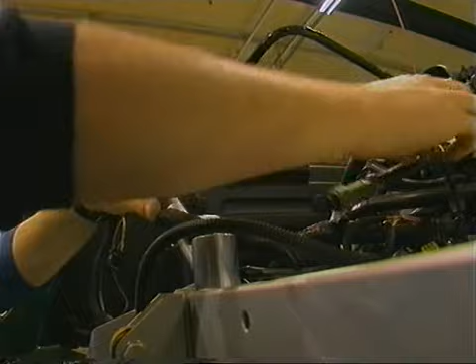More design changes meant more delays and more frustrations on the assembly line, where 7 pilot cars were being built as a kind of rehearsal for proper production. Building these cars was supposed to help the manufacturing team set up a system which would deliver the right parts to the right point on the line at the right time. We're now into the pilot build phase, which is going to enable us to train the operators and to iron out any bugs in the line.

We've now completed the first of the 7 cars, which is short of parts because we haven't got parts to the latest specification due to design changes that we've found from problems in build, and we haven't got new parts in from the suppliers yet. There's around 120 parts short on the first red car.

Some of the parts have had to be redesigned because of fit problems, where parts don't fit together as they've been designed. We find that people who work on different systems on the car, maybe on body or chassis, haven't talked to each other enough, and they've put parts in each other's way, so you can't fit 2 parts in the same place, obviously. It's very difficult and very frustrating to try and drag the parts out of people. You know, they don't seem to realise the importance.

They see the cars dribbling down the line as if it were another phase of pre-production build. They don't seem to realise that we're under great pressure out here to build cars. If we slip 3 weeks now, that's going to be 60 cars we lose off the end of the year when we're building at 20 a week. And that's obviously big revenue to the company. So there's a lot of pressure for us to get into production now, but we can't do it without parts.

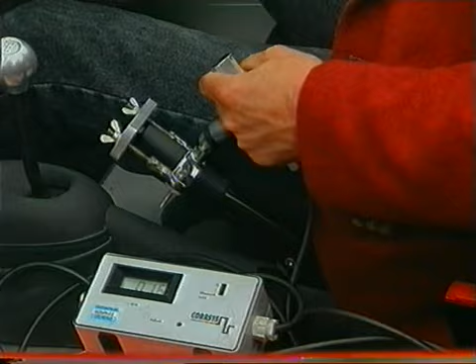Well, I have to carry out the rules, of course, and if it doesn't comply with the regulation, it has a non-compliance, and the work has to be done again. But doing this work is always a cooperation between a manufacturer and the testing facility. And I think our goals may be a bit different, because I want the car to fulfill the requirements, and the manufacturer wants the certificates with as little effort as possible, of course, because it costs money.

This is the first car that Lotus have done, and also one of the first cars in the motor industry that has gone through this complete type approval process. It's a very intensive program, very expensive as well, so you need to get it right, and right first time.

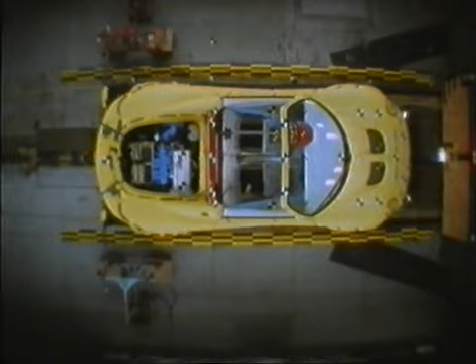As well as carrying out their own detailed examination of the Elise, the Dutch authorities studied film of crash tests which took place in England. There's a series of crash tests, but the main one is the 30-mile-an-hour barrier test, where the car is run up to 30 miles an hour and driven into a solid piece of concrete. This is filmed with very high-speed cameras, and you analyze what moves and what happens in the tests.

We were very pleased with the performance of the car, because effectively we could just take off the front crash structure, delaminate it and bond on a new one, and we could have driven the car back to Lotus in Hethel. This car is particularly aimed at motorsport, and it's not unknown when you go racing to have accidents. The crash structure at the front is a sacrificial part, you can just unbond it and stick a new part on. So those repairs are relatively low cost, and even for the owner who enjoys working on his own car, some of these tasks are not beyond his capabilities.

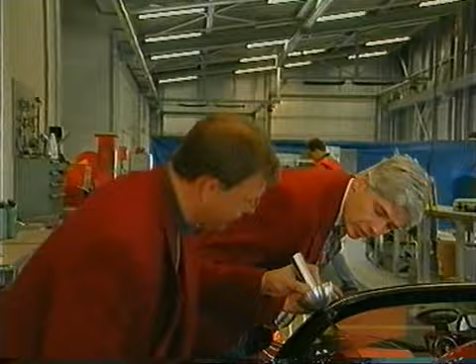Another problem is further down this line. As soon as you come here, it only touches the surface. Well, that will actually be blunted. Yes, the edge of this stainless steel strip. The strip, which is used for attaching the soft top, was considered too dangerous, and the Dutch inspector ordered a design change.

Hello, Dave Barrett. It's Ken Evans here, I'm over at RDW in the Netherlands. Hello Ken, as you know I've got the Ruby car over here at the moment. We've just got a small problem regarding the exterior projections of this vehicle. Which area? You know the steel strip that goes along the top of the windscreen header rail, the retainer for the soft top? Although we have radiused the edge, smoothed it off, it's not really as good as it could be. It's not complying? We'll have a look at it and understand your problem in more detail. We've got a time constraint on this, and I want to present the RDW with a positive view of how we're going to fix it. By when do you need to know? Ideally by the end of this week, but if you could come back Friday morning, I could give some sort of positive idea of what we're going to be doing. Okay, I'll do that - I've got your number, so we'll be back to you tomorrow morning, and hopefully see the best way of resolving the problem. Okay, thank you very much. Goodbye, cheerio.

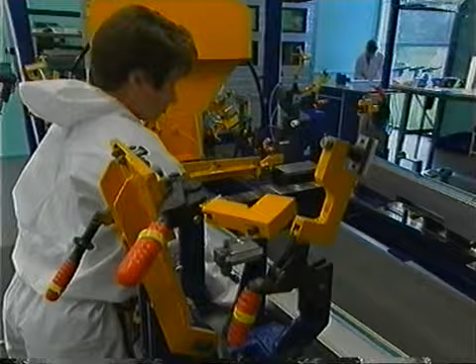By June, Hydro in Denmark were having much more success bonding, or gluing, the aluminium chassis. When you walk through their production line, they happen to be welding a structure for another client, and there's grinders going off, and sparks flying, and dirt and noise and muck. As you go through the factory, it goes quiet, and then there's a glass partition, and there are people in there with white coats on, gloves, picking up the pre-machined extrusions, placing them into the assembly jig, applying the glue, applying the rivets - it's dead quiet, it's peaceful. It's a much nicer thing to do.

The energy required, I think, in the bonding process is a lot less. The accuracy is much greater. It's a very attractive thing for the rest of the automotive world.

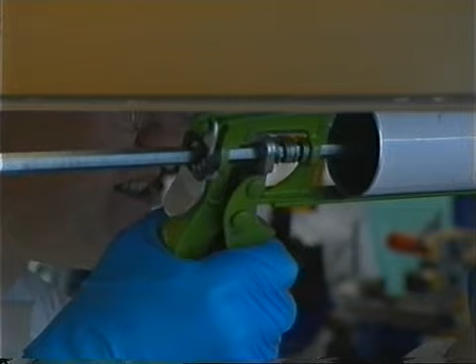The Elise's bonded aluminium chassis is an industry first, and it's created in unique, almost clinical conditions. The main priority is to prevent any airborne contaminants affecting the adhesive, so the air pressure inside the production cell has to be kept higher than the rest of the factory, so filtered air seeps out and contaminated air never seeps in.

Danish health and safety laws demand that the epoxy-based adhesive never comes into contact with skin, so the technicians are forced to wear gloves and protective clothing. The chassis is made from over 40 separate extrusions, and when it's moved from the assembly jig, the glue is still soft. It doesn't harden or become safe to touch until the whole chassis has been cured in an oven at high temperatures for at least 4 hours.

Peter Wainwright, who at one stage had serious concerns about the supply of chassis, is now much more confident. I believe things are over the top of the hill and we're skiing down the other side. We're in production now, and the supply of chassis is good. The way a lot of people are working there is a lot better now. Back in March, towards the end of March, I couldn't see a way forward. I want to see it through to the end now.

See the side rails back there now, where that was dipping down? Is that improving? It's a lot more level round the back here. So that's good.

Lotus hopes the strength of its bonded chassis will convince other manufacturers that it's perfectly acceptable to glue cars together. Well, I think it's how you portray it, really. I mean, airplanes are glued together, as you put it, and nobody worries about flying off to America with a wing that's glued onto a jumbo jet.

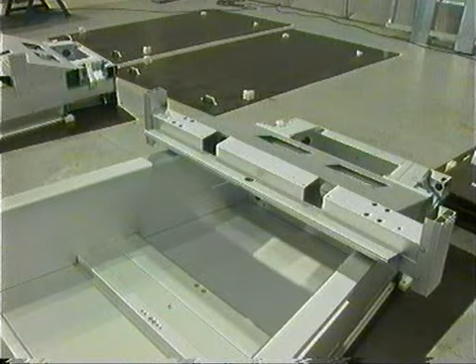So for Lotus to bond, I'm sure, will lead to better things for Lotus. We're now a huge step ahead of anybody else, and with our knowledge we'll be able to go on and make other cars with more complex structures, but this is a great starting point.

In June, somewhat later than they'd been promised, the motoring press finally got their chance to drive the Lotus Elise. Completed cars were still in short supply, so there was no razzmatazz, no glitzy press launch in the south of France, just a chance to drive and photograph the car for a day in the countryside around the factory in Norwich.

Lotus has never gone in for expensive advertising campaigns to promote its cars. It knows that if new products live up to Lotus traditions of ride and handling, the enthusiasm of motoring journalists like Ray Hutton will promote the car for them.

I wonder whether people generally would want a car with so little room in it, because the two of us are sitting here with our shoulders rubbing together, and that might be quite nice for some people, but I don't particularly want to do it with a photographer.

And I'm just going to finish off on the nose here. Okay, badge and headlights, etc.

Well, that only has the same power as an MGF. It's a good deal lighter and therefore considerably faster. Brakes are extremely good as well, but no servo - I suppose that's part of the good response. No power steering, of course, and we've all got used to that in recent years. So to go back to something which is really a sort of raw, basic sports car, but which is so well done, is really, really fulfilling.

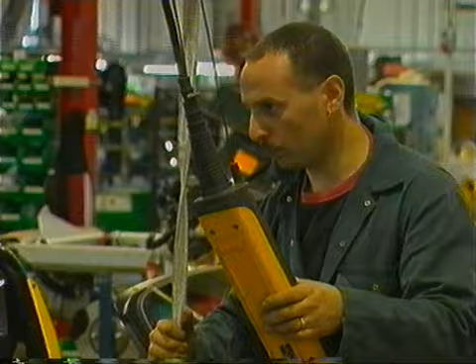One of the equations we've got to sort out very quickly is the question of supply and demand. We originally underestimated the level of demand there would be for this little car. This year, the first year of production, we were going to build just 400 cars. Of that 400, only 200 were for the UK - a tiny, tiny number. Next year, we were originally looking at building 900 cars, again with roughly half for the UK market and the rest for mainland Europe and the Far East. It now looks as though we considerably underestimated that original production objective, and our chairman has recently stated he's looking to increase production up to 2,500 vehicles a year.

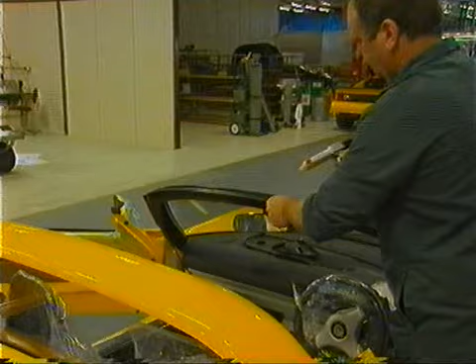At the moment we're producing one car a day down the assembly line. We've got a few cars off the end of the line waiting for finishing touches before we can pass them off to the dealers. We're currently training new staff so we can increase volume to 2 per day by the end of next week. Following on from that, we'll be going up to 3 a day, and very soon after that 4 per day, which is our maximum production rate.

We were very frustrated early on with the short programme and late release of parts. Not being able to have the parts online to build the car in sequence was very frustrating, but at the end of the day we overcame the problems one way or another, either by hand producing parts to get us out of a muddle to see how things fitted together before the production parts came in. But yeah, it's pretty good. We've still got a few little engineering issues to sort out, but nothing that will stop us selling the car.

But two weeks before the first car was due for delivery to a customer, the whole company was rocked by a boardroom revolt. Lotus Cars and the more profitable Lotus Engineering division had been on the market for a year. Potential buyers had raised doubts about the future of car production. In a bid to end the uncertainty, four directors and the company secretary confronted the chairman, Romano Artioli. All five of them were suspended.

Well, on the Friday, what happened was that the board decided to try and force the pace in terms of sale of the company, and gave Mr. Artioli an ultimatum. And Mr. Artioli doesn't like ultimatums, and responded on the Tuesday by bringing in a bunch of lawyers and effectively marching them off the premises. It's typically Lotus. I mean, Lotus never does things the easy way. We've had this huge bank of good publicity, and we're on a roll, and then suddenly we have this. And I think it's just very character-forming.